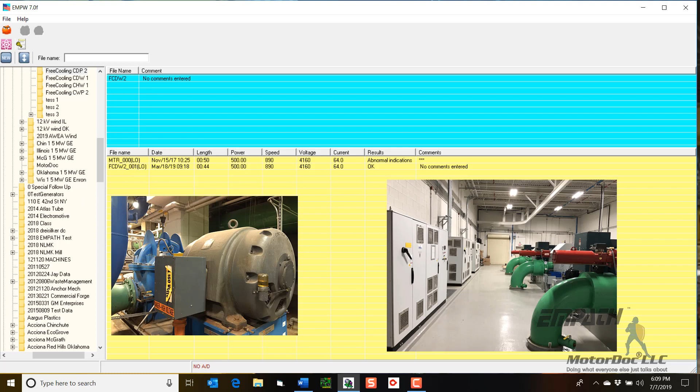Welcome, and we are going to perform electrical signature analysis diagnostics on two pumps. Not submersibles; they are horizontal pumps, as shown here and here and here. Give that a few seconds to show you what the pump systems look like.

First one we're going to do is the larger pump stator, and that one is this one here, and that is across the line. In fact, let's pull up the nameplate and put that here so you can see the machine: 500 horsepower, 890 RPM. You notice a little cheater pops up that tells you what each of these are.

4160 volts, 64 nameplate amps. From the database down here, we got 76 rotor bars and 96 stator slots. We do know the blade count is 6 on this split case pump, and the bearings are 6320 bearings. They're not ZZ, they're actually oil bearings, so they have no shields on them. Over here, I can put other information related to the machine, but not going to worry about that.

So, in any case, we have the nameplate here. That's already in. We're at 60 hertz. We are running across the line. These are the options I have for different types of alarms and calculations. I have selected induction machine. On the other one, we will select VFD. Now, we did take current only, as shown here, which we can take a look at.

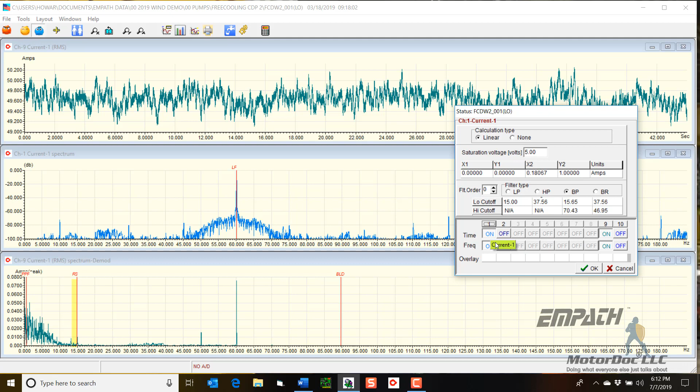These are the channels that we took, and then I can display. So anything that's highlighted here I can turn on. Just for fun, let's make it a little overcrowded. There we go. Let's get rid of some of this because we didn't take voltage. I could just turn it off. I do have the ability to do current or voltage demod as well. That becomes important when I am analyzing things like generators and so on.

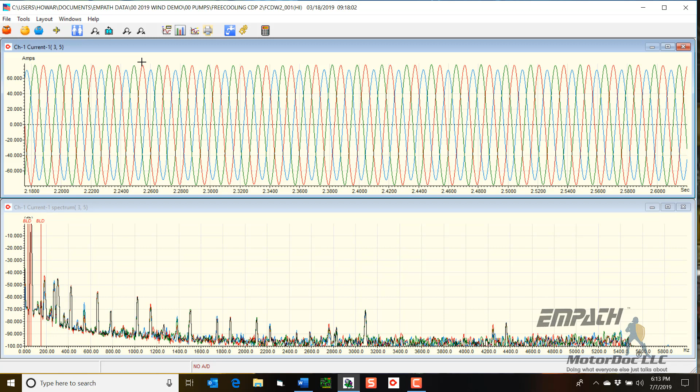So this is my information here, and here is my high frequency data set in current. Okay, so that's all three phases together. I can shorten this up, which will also change my resolution down here, to see what the waveform looks like. You'll notice that it's not as sharp down below. If I have a spot where something shuts off and I want to analyze around it, or analyze that area in different loading scenarios, I can highlight that and it'll change what I'm looking at down here. And then I can step backwards.

Okay, so here I'm taking a look at this. The noise floor is down below, but I'm not worried about anything down at that level. Stuff I'm going to look at includes blade frequencies, such as this one right here. Let's set up the power harmonics, because anything that is a line harmonic, green or red, I usually ignore. Everything else I can analyze. So I do have something going on with the blade.

I can also take a look at things like interturn shorts. Not really, there's nothing going on there. This is line frequency. This is the blade, of course, and I don't really have anything on this side. So the windings don't have any interturn stress. Stator mechanical, let's zoom this back out. This is the mechanical area. Again, I can zoom in and take a look. Stator mechanical, such as this.

So I have some movement of the coils. This would be coil movement, stator movement, something having to do with the stators. Could be on a large machine missing wedges, things like that. But this is usually movement related to the coil. With the age of these machines and their general condition, it is most likely movement of the coils in the slots.

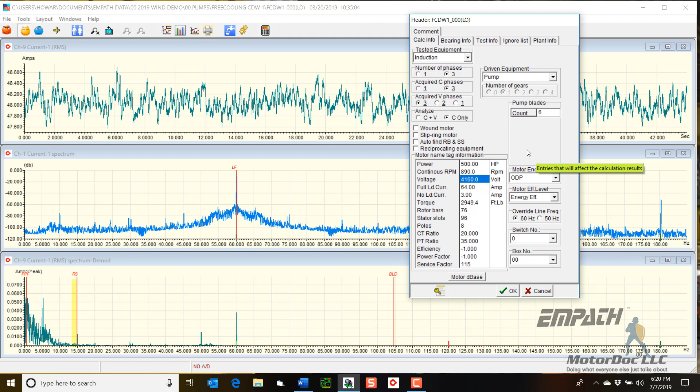So I just have to change it here, and what's really neat is if I have made a mistake, I can click on that and poof, there it is. So 60 and 90 is 150, so right around 150, there's a peak there. That is a blade frequency. So I just want to make note of that, and then I'll pay attention to that when I look at things like turn-to-turn shorts.

Again, all the noise down here, there is a heightened pole pass frequency, but that's buried in here. So I normally won't make a call unless I have a definitive pole pass frequency peak showing up past that point. So let's go ahead and let's do the shortcut just for fun.

There we go. Now it says bearing indications detected. So this particular one, potential bearing fault. Let's click on bearings. This would be a bad cage. We actually do know that these things had bad cages. They're pretty old and hadn't operated in a while. It's oil filled, so there's some rust going on inside there.

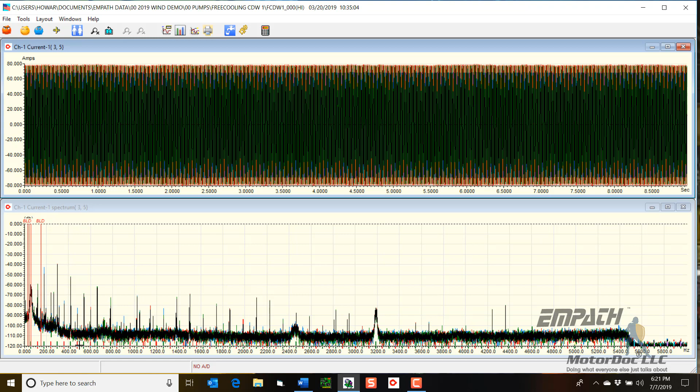So everything else looks all right, but I can also confirm that by going into my high frequency data set up here, which we were going to do anyways. Notice also this is 120 dB down. There's all my noise. Let's get rid of that so that the peaks look more impressive and scary.

I do like using the larger screen if I'm trying to impress my friends.

So anyways, let's take a look real quick. Unlike the last one, I am not seeing a significant blade frequency. It's very low. It's below 65 dB down, whereas the other one was up here. So I do have that blade frequency here. And this is the second blade frequency. The second blade frequency is related to what we saw before. That's my running speed sidebands of my line frequency.

Let's take a look at interturn shorts. So ignore this one because it's line frequency. I do have one here at about 90 hertz. That's not unusual. And I do have one in closer here, 75 hertz. This is actually the running speed, so I'm not going to pay as close attention to that. I do have some definitive peaks now showing up here. So right now I'll call that cavitation. I'm not seeing anything that would say that it's rotor bars, and I'll explain that here in a minute.

Let's now take a look at bearing damage. So let's take a bearing. Now we come in here and we take a look. There is a bearing peak there. There is no bearing peak there. So this is most likely the one that's related to the cage. And I don't see other bearing peaks. So that is just a cage frequency then. So it's something we should consider. If the cage starts to come apart, we will have problems.

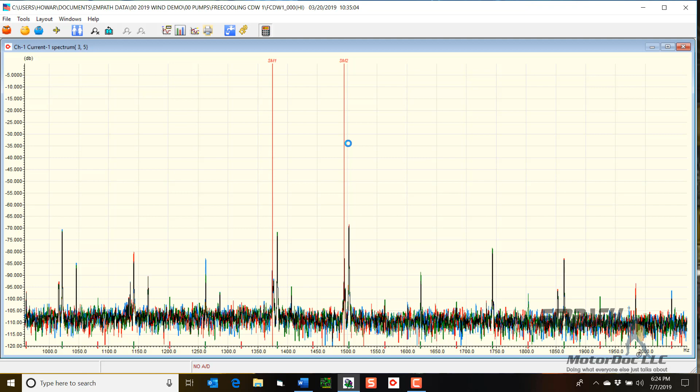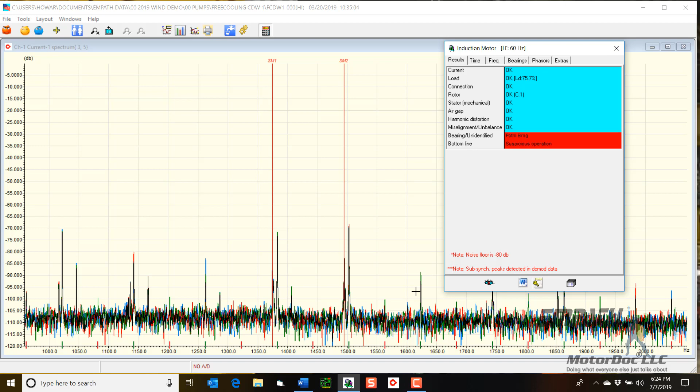So for some reason, these two machines that we tested before and after have moving coils. It could be things as simple as the tie downs not being good enough, or the bracing not being good enough inside the stator while it's running. Now this is running at about 75% of load. So yeah, some movement can be expected. Okay, and we'll come back to this again as soon as we hit the low frequency stuff, because I want to show you one more thing here.

Now, I said could it be rotor bars? Well, I don't see anything indicating rotor bars here, so I would see a regular pattern if it was rotor bars. At worst, maybe casting. Well, no, this is a copper bar, so it would have to be rotor bars, and this would be in a regular pattern. That is covered under a different presentation. So we've looked at two of these.

Let's go ahead and see what a report looks like real quick in EMPATH. So I have this potential bearing. It does note that subsynchronous peaks are detected in demod, and the noise floor is below a value that we expected. So let's go ahead and open this up. Now this would put this machine into a database. This will allow me to copy, and this of course does the analysis.

So the database allows me to trend. So if I want to go in and do a trend of this particular motor, if I have a whole bunch of tests, it will show each of those peaks as I showed back here in the extras. So Word is a Microsoft product. It tends to take a little bit to pop up.

And there she is. So here is our report. So this is it here. It does a quick checklist. It's in Word, so if I don't agree with something, I can change it. I'll often come up here and add some notes identifying the machine, and I might put some additional notes down here. There is a notes section for saving stuff, but if I want a particular message for a report, I'll just type it in, and it won't cause anything to go out of order.

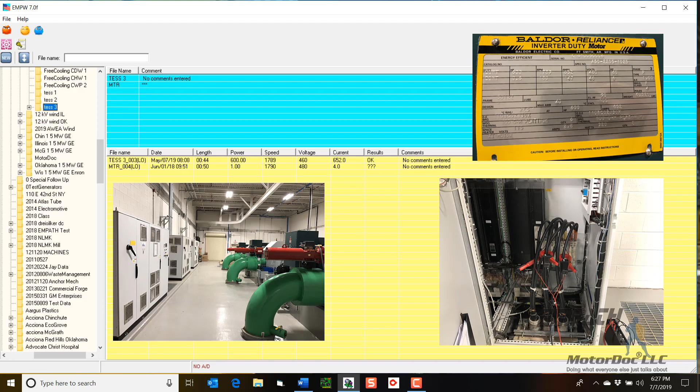We'll see that again. So let's go ahead, and this time we are not going to randomly select. We're going to take this machine here. As you can see, I've tested it once before. This is a machine I was commissioning. This is the picture of it here, and here's the nameplate as well. So give it a few seconds so you can see it, and that's the pump station for each of these three pumps. So I come in here and I select this date.

Now this one's interesting because there was a lot of cavitation, so there's some things going on. You'll also notice this is pretty straight. It goes trending kind of down. This has to do with the pumping part of the system. So here's my blade frequency. Let's take a look at the nameplate.

So up here you can see I selected VFD, three phases, both current and voltage. This one is really simple because it's a Baldor. They provide data readily. So it's 46 rotor bars, 60 stator slots. It's an 1800 RPM or 4-pole machine, 600 horsepower, 460 volts versus the higher. Again, this one has 6 blades, pump. This is actually totally enclosed fan cooled. I can change that again at any time.

This has to do with continuous monitoring, because my data collector is set up also for continuously monitoring. So in any case, the bearings are 6322s. I had to decipher what was on the nameplate. The bearing database is significant. Here we go. I have a bunch of manufacturers, and under each manufacturer I have pretty much every bearing they make. So in this case I'm just going to keep it there.

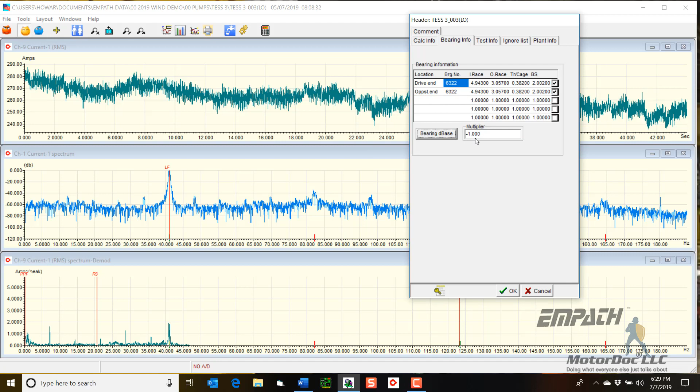For that, if I put a -1, it will look for non-integer multipliers of running speed. So here we go. That's all set. I'm not doing any of those. This is the motor database. It has 8,400 electric motors of different manufacturers in it. We're not changing anything there. So that is everything having to do with that. So now we come back to this pump.

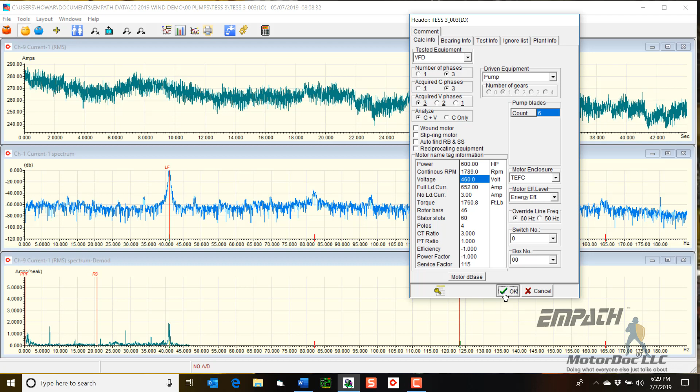It's on a VFD, and you can see that I'm at about 40 hertz. It's going to select a running speed. Let's let it do the running speed a little bit, and again, wait for my computer to get around to it. You can see I got double peaks here, by the way, and that's because this was not maintaining constant speed. So I come in here, right click, and do running speed and pole pass frequency. Let it select my running speed.

Now I can disagree with it. So if I come in here and say, you know what, I think this is my running speed, I can do that. Okay. It's going to show me some potential issues. I can also say, okay, I think this is my pole pass frequency. Then it's going to start playing around with my running speed. There's my bearing indicators again.

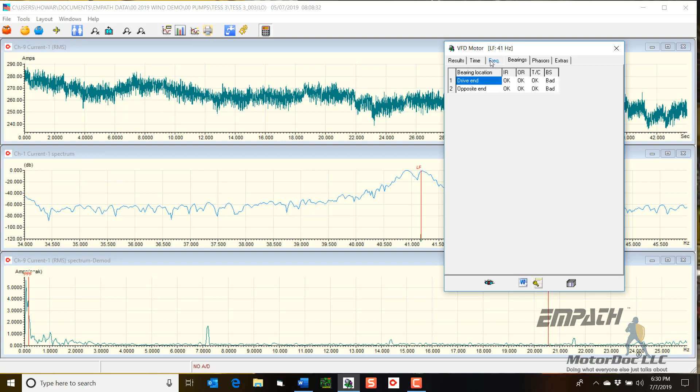So in this case, I have bearing indicators, and this one is saying, ooh, bearing. So this one is saying the balls are bad in this, and we've had problems with this. In particular, we've had some discharging going on. The other thing we will note is because I'm taking both voltage and current, I get a torque graph. So this is my running torque for 10 seconds. I can change that to a longer period of time. And this is my actual torque peaks.

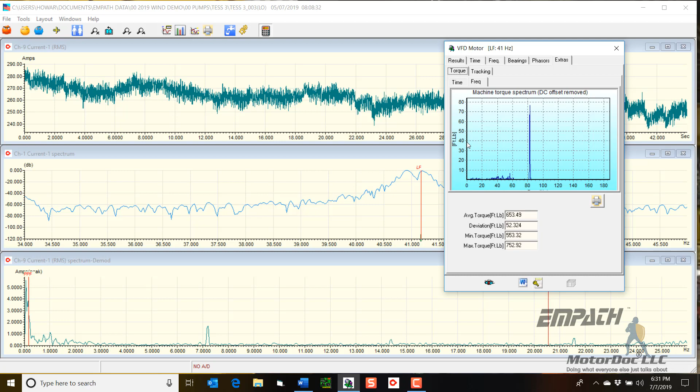This is just over 80 hertz, so that would be just around twice line frequency. So I can take a look and see what's going on there. I can also come in and highlight certain things. I don't have a lot going on here, so it's not a big deal. If I swipe back to the left, there we go. It gives me my torque information, also all the stuff that I can track.

And now that I've got both voltage and current, this is what's trended in the database. So all of that's trended. Now I've got additional information. I can even change this to horsepower if I want to impress my friends. But in this case, it'll be in kilowatts and everything else. So there's my amps and voltage. This is my actual real power. This is the power factor going on.

You notice that looks a little low. So there's some things I can do to see if that is accurate. But we cover that in the full course. And then down here, 27% of load, full nameplate load. This is the estimated efficiency based upon the ORMEL 96, which is Oak Ridge National Labs calculation. These are losses due to impedance unbalance, usually connections and other issues in the system.

And then these are the torque, and this is the output power. So basically it's like an inside dynamometer. This is something that's been here for a long time. Other people are trying to figure out how we do it. Calls rotor bar health questionable, and as you can see, there is a slight pole pass frequency. There's most likely casting voids in this. To be perfectly blunt, based on my experience, I would ignore that. The thing I'm more concerned about is the bearings.

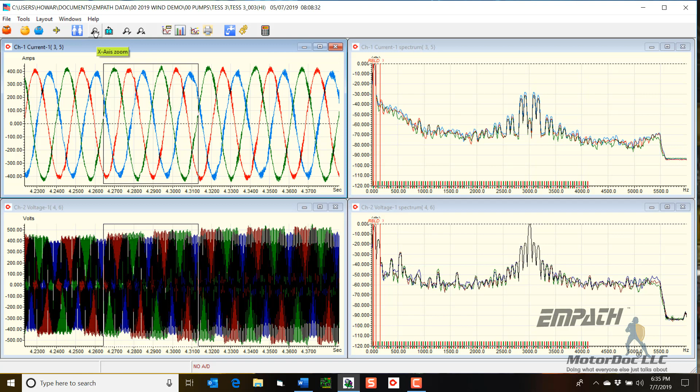Those peaks are rather high. So let's take a look and see what's going on here. You can see those peaks there, but let's just go ahead and X in and see what happens here. Let's go in even closer just for fun. And this is what the sine waves start to look like. This noise here is what we're analyzing. This is the pulse width modulation coming out. You can see kind of a shadow of what looks like a sine wave in the background.

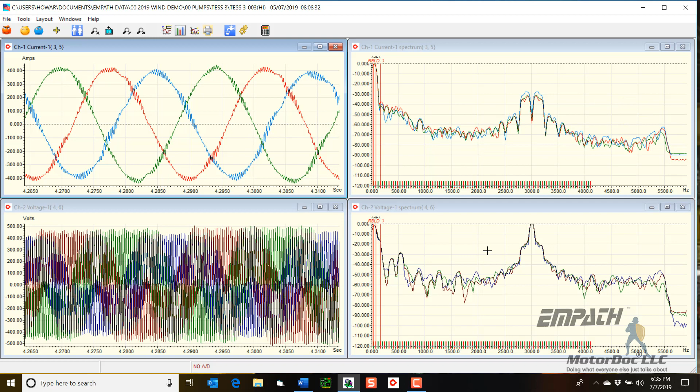But these peaks here are associated with noise. Those are those high peaks, as well as this one here. So let's step back, and step back. There we go. So let's get rid of these now and do a quick look as to what's going on. So first off, just to quickly summarize before we start analyzing anything here, we know we have a bearing issue. It has to do with the balls on the bearings. But I'm not seeing anything significant out of my torque, which is good.

Let's go ahead and start taking a look at a few things. So we're going to do the higher frequency stuff. So stator mechanical. Now, why do I like having both voltage and current? Well, let's see. Come in here, we've got peaks. They're relatively close to line frequency. They only exist in current. They do not exist in voltage. Therefore, it is motor related.

It's probably some noise having to do with movement of the coils. Not unusual, especially in this type of machine. But if I see peaks in both, if the peak in voltage is higher in dB than the current, then it's somewhere outside. And we've got 3 machines on here, so it could be something from the drive, could be something else. In this case, we do not. We have these so that it is definitely associated with the motor.

So let's take a quick look at dynamic eccentricity. So let's pop back. Let's take a quick look. I often do this much faster, but for demonstration purposes, we're walking through. I don't see anything here.

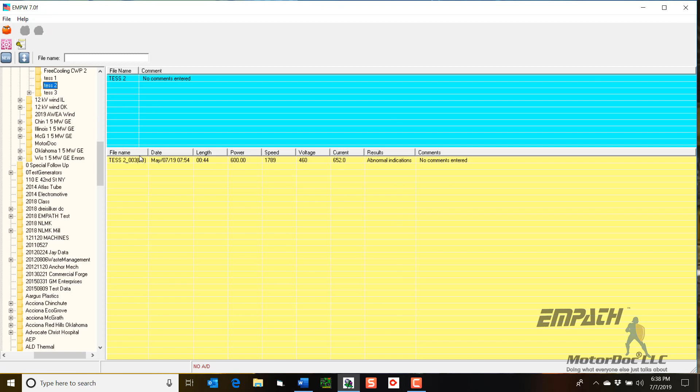So let's take a look at a second one. And this one we're going to go through much quicker. So let's go ahead and see how I take care of these. Again, a lot of noise, running speed, etc., blade speed. There's a peak down here. I don't see the peak up there. Let's go ahead and take a quick peek and see what's going on here.

Okay, jumped right into torque. So here we go, and I am going to let it calculate my running speeds. Running speed should end up right around there. If I do not agree with it, I may select a pole pass frequency, such as right here, just for fun. May or may not change that. Oh, running speed changed. Okay, so we have a change in the running speed.

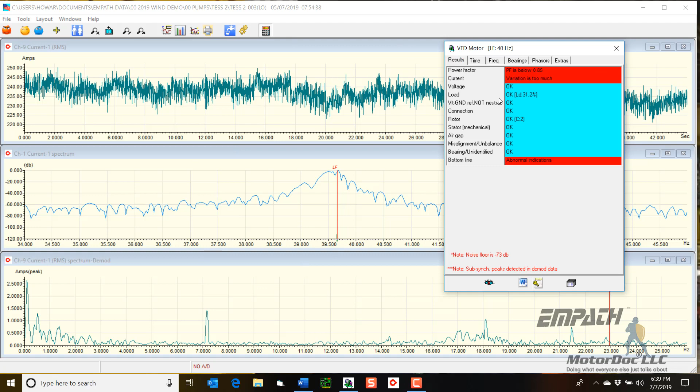Now let's look and see. Okay, and we'll do it again one more time. Okay, it really wants, this is the running speed, so we'll say it's probably the running speed. Now it's telling me current is changing a lot. Now what's kind of neat is when I run this on a standard system, this screen pops up immediately and it does everything automatically that I'm doing manually right now.

So let's take a look. We're at 31% load, yada, yada, yada. We got a higher percentage unbalance to do that, so I'm going to check connections. I've got relatively low here. Let's see, all this stuff looks about right. It says current imbalance, and there's just a slight shift that way. It's on the output of a VFD. Not going to worry about it.

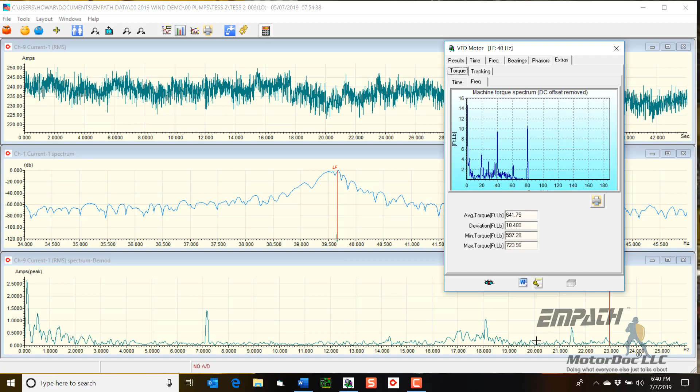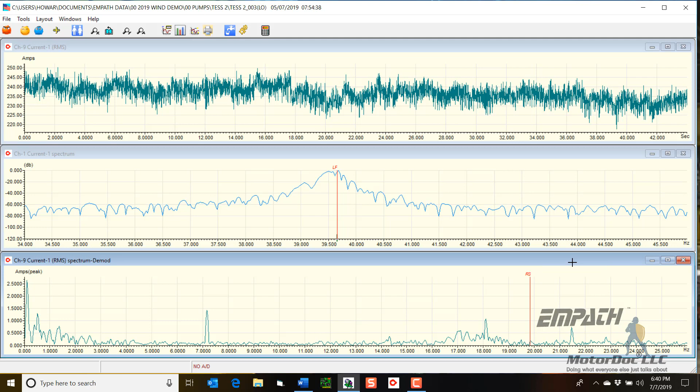Bearings look okay. Torque. Now I've got some torque at line frequency and twice line frequency. And then I have some other peaks in here, including this 20 hertz one, which is right around my running speed. It's right there, so I'm going to say that chances are that that 20 hertz was my running speed. So let's go ahead and we are going to change this. I do go through this in depth in a class, so let's go ahead now and we will go back.

So there's that. My running speed is 19, so that would be at 60. I don't have any side bands there or there. That would indicate something having to do with unbalance. I do have other peaks going on that are subsynchronous. Those will all have to do with the pump, and there's that frequency there. So let's go ahead. Whoop.

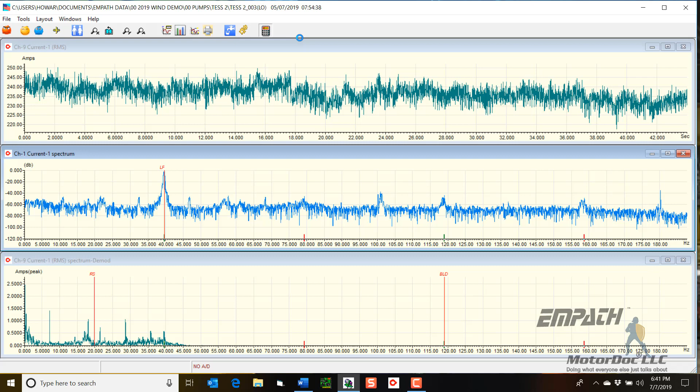Let that open, and then we'll close it. Okay. Let's go to my high frequency data set. I haven't looked at this material in a couple of months, so here we go. Those are all the peaks. I have an option here if I really don't want to have, because I'm looking at three phases, see black, green, and red. They're going to be the same, roughly, the humps and everything else.

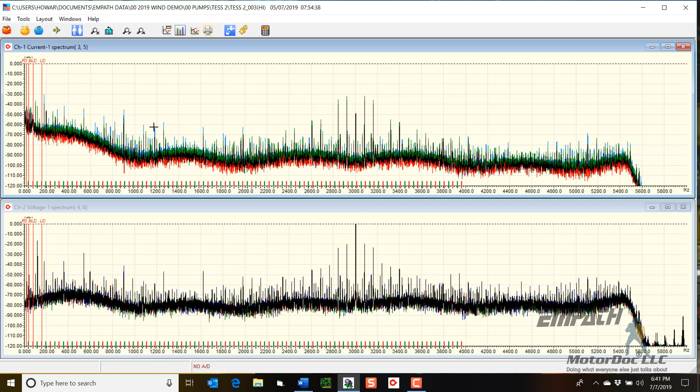If I want to make life easier, I can come up here and turn off those frequencies. Ooh, there is one other thing. And I can turn on that one. Okay, so here I have my voltage spectrum. Here I have voltage, here I have current, and this one, you'll notice the peaks are different. This is power or kilowatt spectrum.

Now, I have to go in here and manually find these in any case, but these are actually not sidebands of 60 hertz, but if I go rotor bars times RPM, I will get a single peak. So this looks more like what you would see. This is more like vibration data, except you're looking at the peak down versus the base up. So we're going to go ahead and close this out because that's for the advanced class.

And let's take a quick look here. So let's start out with stator mechanical. Do I have anything going on? Not really. That looks pretty darn close to line frequency anyways. Let's take dynamic eccentricity for fun. And we'll back out. And we're going to get down in this area here. I like getting in close so I can see it. That does not look like I have much in the way of that. Static, nor any static eccentricity. So let's go ahead and back out.

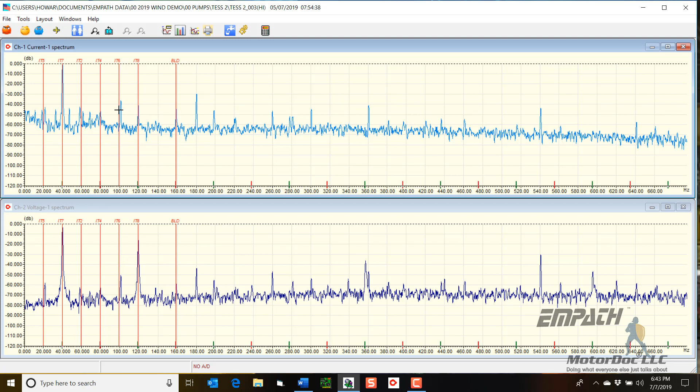Let's take a look at interturn shorts. Now, neat thing is on VFDs, if I do see things related to interturn shorts, such as this peak here and this peak here, showing up in both voltage and current, I would say that is called winding stress. So I would usually recommend that somebody go back in and do some type of retuning of the drive when you see those types of peaks. Blade frequency out here, there it is. Also coincides with what looks to be a line frequency peak. So we've now taken a look at that.

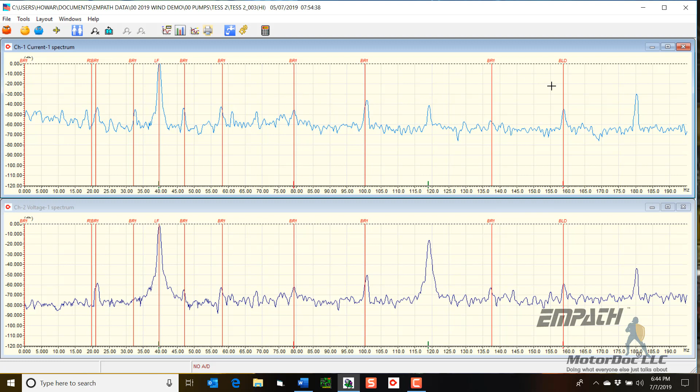Let's take a look at the bearings. And we'll get in even closer. So here's a bearing peak there. So if my line frequency peak shows up, let's try to return. Yeah, so probably not going to be that then. So this is more than likely going to be bearing issues. Yep, there's bearing peak. That's with line frequency, so ignore that. There's another bearing peak there, and small peak here. So those would be related to what we identified before, which is the ball spin.